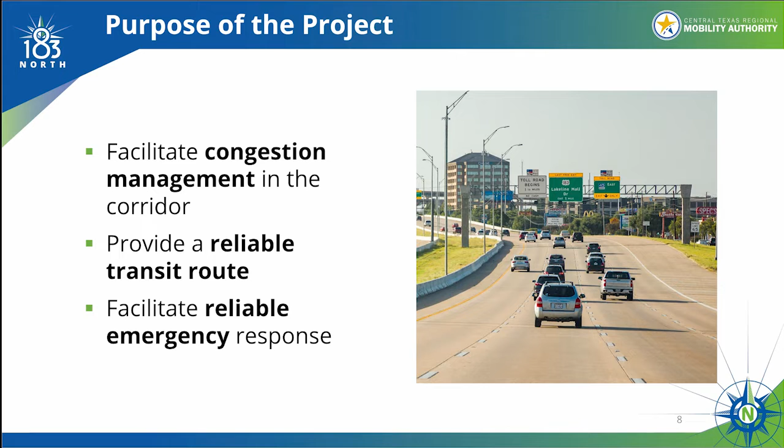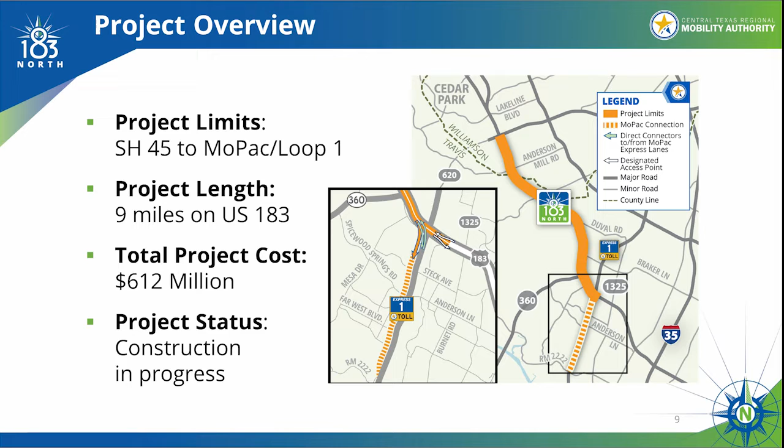Here are some of the key details of the project. As you can see on the map, our corridor is mostly between 45 and Mopac on US 183. The length of the job is approximately 9 miles long, and the total project cost is $612 million. We're currently in the phase of active construction. We will talk more in detail throughout the presentation about the improvements coming as part of this project along US 183. We will also talk later about the improvements we'll be bringing in the Mopac area, highlighted in the black square inset in the middle of the screen.

Here are some of the highlights of the project. We're building both tolled and non-tolled lanes. The project includes the construction of 2 express lanes in each direction and the addition of a general purpose lane, so that the total number of non-tolled lanes will be 4 in each direction all along US 183 between Mopac and 45. We're also bringing multimodal improvements and enhanced safety, which include new shared use path connections, new sidewalks, new cross-street connections for bicycles and pedestrians, enhanced traffic monitoring systems for improved traffic management and emergency response, and LED high-mast lighting, which will help increase the safety of the corridor.

Finally, we're addressing a mobility solution for travel between US 183 and Mopac, with operational improvements to southbound Mopac and adding express lane direct connections, which will be constructed with Mopac to the south, so that drivers are not having to exit the toll road to get on and off 183 if they don't want to.

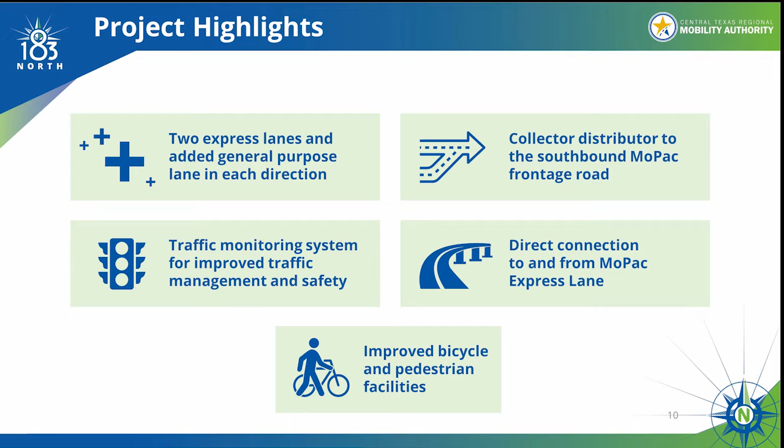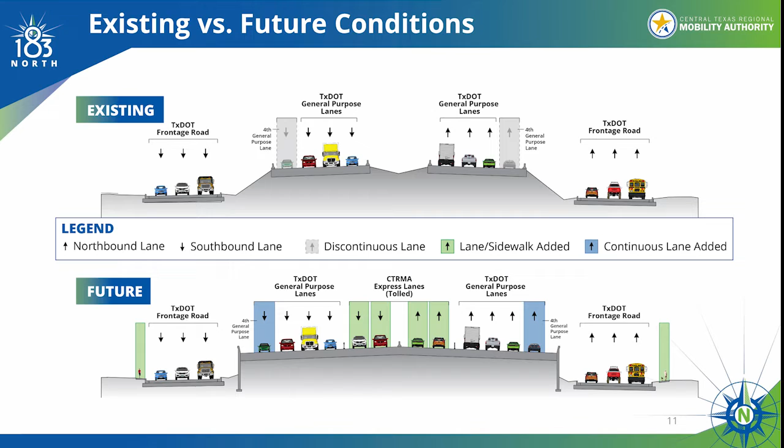This depiction of the existing and future conditions of US 183 highlights the added tolled express lanes in each direction, shown in green, as well as the additional non-tolled general purpose lanes shown in blue. When completed, those looking for a more reliable route on US 183 will have a choice to use the 183 North express lanes. Drivers who prefer not to pay a toll will still have the option to use the improved non-tolled general purpose lanes. Also shown in green on the outer left and right of the graphic are representations of newly connected sidewalks along the corridor business centers.

In addition to adding a 4th non-tolled general purpose lane in areas where there are only 3 today, the project is also improving auxiliary lanes and merging conditions in certain areas to increase mobility throughout the corridor.

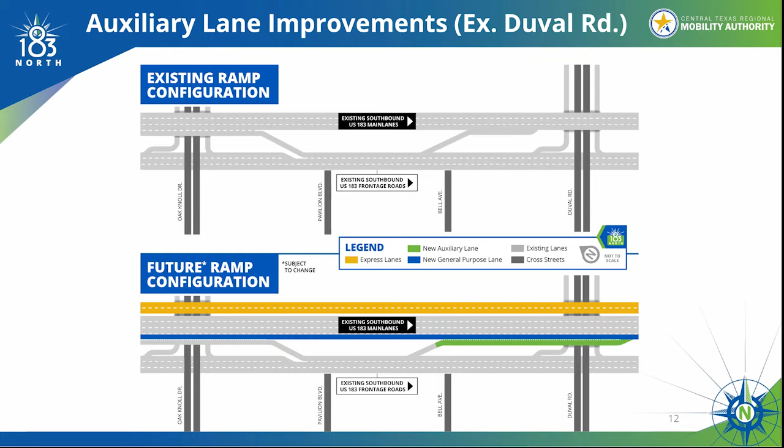One specific example of this will be seen at Duval Road on the southbound side of US 183, an area that's typically very congested. Here at Duval, the longer entrance ramp that we'll be building facilitates safer merging conditions with US 183 main lane traffic. The additional distance allows onboarding traffic to get up to speed over a longer length of space prior to having to merge in. In the existing condition, you can see how that entrance ramp is very short. It's tough to navigate, made even more so by the fact that it's actually in a curve. So the addition of the new general purpose lane and the lengthened ramp there will effectively target improved traffic operations, which in turn will reduce congestion in that area.

Now going back to the area at Mopac that I mentioned earlier, we are also bringing much needed improvements to the area of US 183 and Mopac to help the flow of traffic there between the 183 express lanes and the Mopac express lanes, with a direct connector structure as well as a new collector distributor road. This illustrated map is a great visual for understanding this portion of the project.

Beginning with the area shown by the number 1, the direct connection, sometimes referred to as direct connector or DC for short, will allow travelers to go from the tolled 183 express lanes to the Mopac express lanes, and from the Mopac express lanes to the northbound 183 express lanes. This structure also connects drivers to the area marked by the number 2, which is a collector distributor road, meaning a road that collects and distributes travelers to a signal bypass.

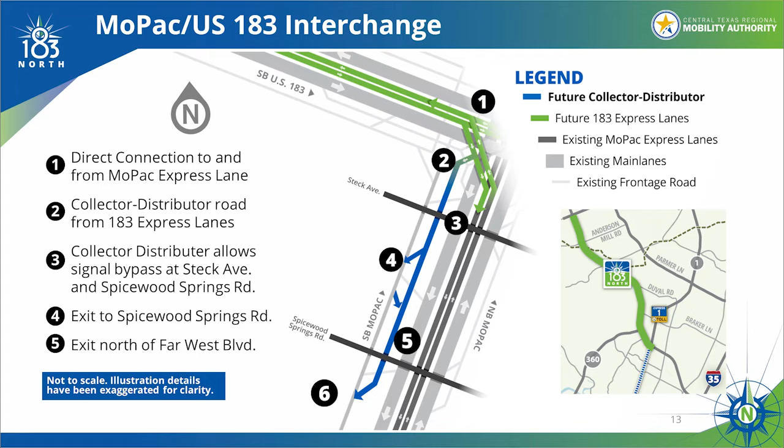So number 3 points out this bypass of traffic at both the intersections of Steck Avenue and Spicewood Springs Road. The following markers for number 4 and 5 show the exit for Spicewood Springs Road and the exit north of Far West Boulevard, completing the flow of improved travel. Not only will travelers be able to bypass the Spicewood Springs intersection by traveling directly through to the Far West exit, they will also experience greater mobility since they won't be merging with other drivers.

All of the project improvements are designed with the community in mind. Our goal is to increase mobility in the corridor for better quality of life for the entire community, in addition to helping ensure that emergency responders can get to you when you need them.

Currently, most sidewalks along the 183 North Corridor are not ADA compliant, and there are areas where sidewalks are just non-existent. The project will add sidewalks where they don't exist and improve existing sidewalks continuously so that the entire corridor is ADA compliant. The project will also provide safe connectivity for bicyclists by closing existing gaps to provide a network of continuous bike lanes between SH45 North and Mopac, as well as construct 2 new sections of shared use path.

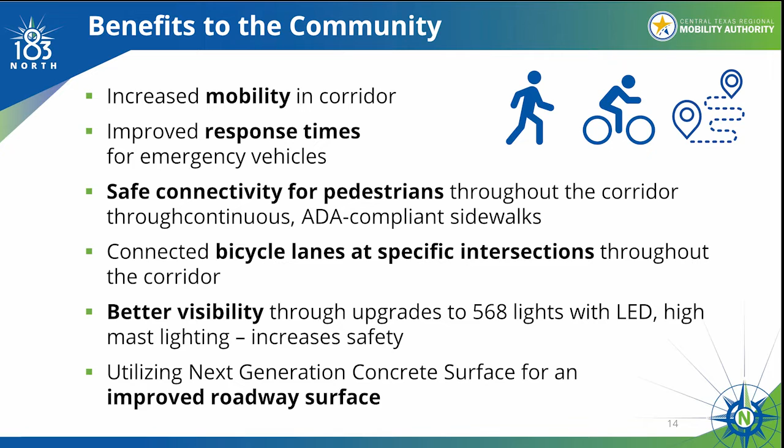The project also includes a new technology road surface on the non-toll general purpose lanes called Next Generation Concrete Surface, specifically designed to result in a better driving experience. Finally, road crews have installed new high-mast lighting fixtures along US 183. The new lighting provides a more efficient and eco-friendlier alternative to the conventional lighting that was previously along the corridor. High-mast lighting improves safety for commuters and pedestrians by providing visibility on the highway during nighttime and low visibility events.

For some time now, there have been temporary traffic shifts allowing us to retain 3 open lanes in each direction. At this point, there are parts in the north of the project near McNeil where there are 4 travel lanes already. Phase 1 is simply a continuation of preparing the lanes that will be used for shifting traffic over the second phase of construction.

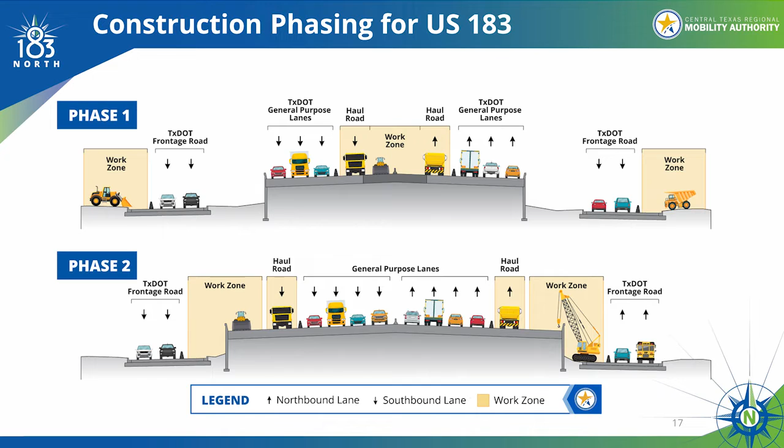Looking at the bottom half of the graphic, it indicates this effort as reliant on the preparation of the work zone, which will then be on the outside of those center lanes, making it possible for us to embark on constructing on both sides the 4th non-toll general purpose lanes from McNeil all the way down to Mopac.

Speaking of Mopac, during phase 1 of our work there, we will address the main lanes. The focus will be on expanding the existing frontage road so we can move traffic over on the main lanes to facilitate building the new direct connector approach between the express lanes.

Mopac only has one express lane in each direction in this area, as you can see in the bottom image. As a result of construction phasing and switching traffic, the work area will then be larger to accommodate the work on the direct connector and the additional connection to the 183 North express lanes.

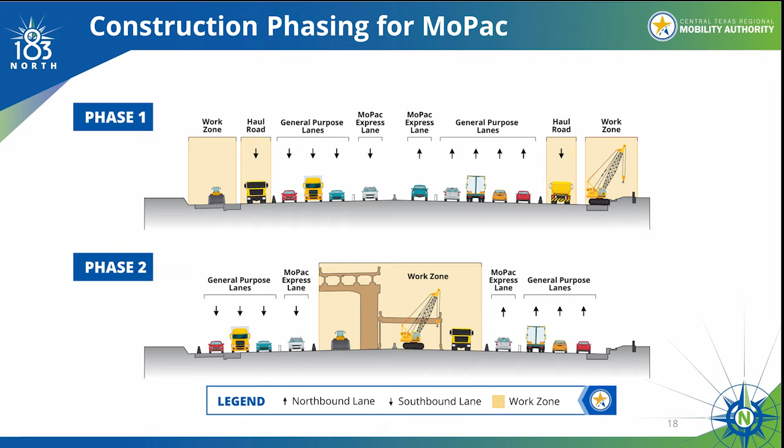Phasing our work in this way is truly a blend of step-by-step processes, along with simultaneous development of prepping work areas for those specific processes, all while minding existing public travel needs, safety, and a variety of other associated factors.

In 2023, our crews accomplished some great construction milestones, including 100% completion with concrete substructure work in the center median, 50% completion of the outside concrete substructure widening between McNeil and Great Hills Trail, and 75% completion on the interior widening concrete paving from Lakeline Mall to Mopac.

We installed a temporary ITS system that is fully in place between Mopac and 183. Additionally, we completed the inside widenings of bridges at Lake Creek, Pecan Park, Anderson Mill, McNeil Spicewood Springs, Duval, and Balcones Woods. In 2024, crews will continue their work as we track towards project completion in 2026.

Let's take a closer look at some of these activities.

Sidewalk construction is a very special part of this project because we are addressing the disrepair and lack of ADA compliant connected sidewalks along the US 183 frontage roads. Our work to bring continuous sidewalks along the entire corridor involves a lot of coordination with local businesses, utilities, and of course the traveling public.

To complete this crucial task, we're required to work closely with the business community to reconstruct multiple driveways that pass through the sidewalks, or sometimes add sidewalk where there was none. We will detail more on how we have been communicating and mitigating impacts to these businesses in our outreach discussion.

An important piece to note is that for businesses with only one driveway, we only work one half of the driveway at a time. Or if they have the option, we always maintain a second entrance for team members and visiting customers.

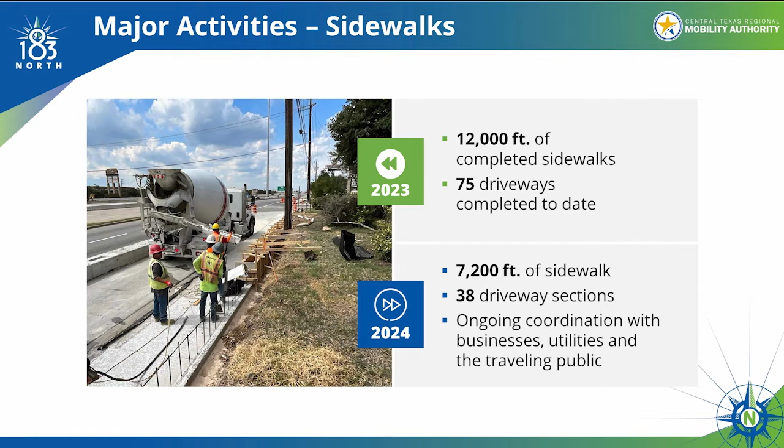Other highly visible changes on the project are bridges. When we start work on the outside bridges this year, we will have to temporarily close lanes that are directly next to or close to work zones for safety purposes.

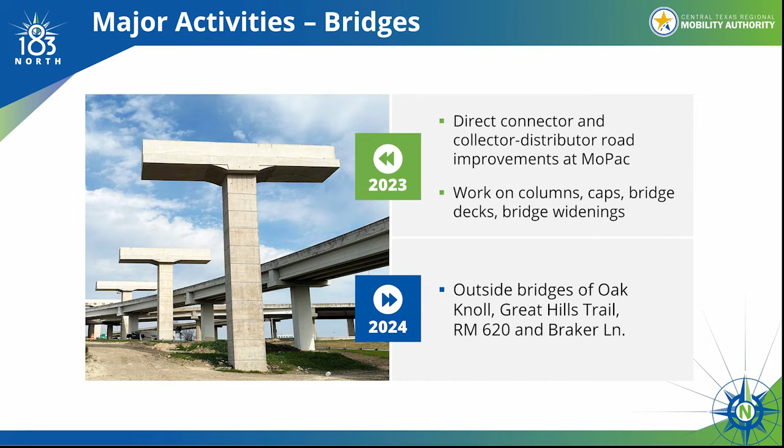The outside widening bridges at Oak Knoll, Great Hills Trail, RM 620, and Braker Lane are still to be worked on this year. The traveling public can expect to see U-turn closures and periodic closures of Mopac and US 183 as we build all of these overtop features.

This year we will work on adding the fourth general purpose lanes. This means roadway construction will take place as crews work on widening lanes and building retaining walls.

As we saw in earlier slides, this work will involve the frontage roads and will include various drainage improvements. It's important that the traveling public understands that our earthwork crews spend a lot of time in the center median to prepare these sections for handling traffic flow, while newly closed areas become support for building retaining walls correctly.

While the specific wall work that follows through 2024 will mostly take place at night, it will require some continuous lane closures to allow a total of 14 crews to work in the designated areas for a number of months on these retaining walls. Putting it simply, US 183 main lane closures will decrease this year, but frontage road closures will definitely increase.

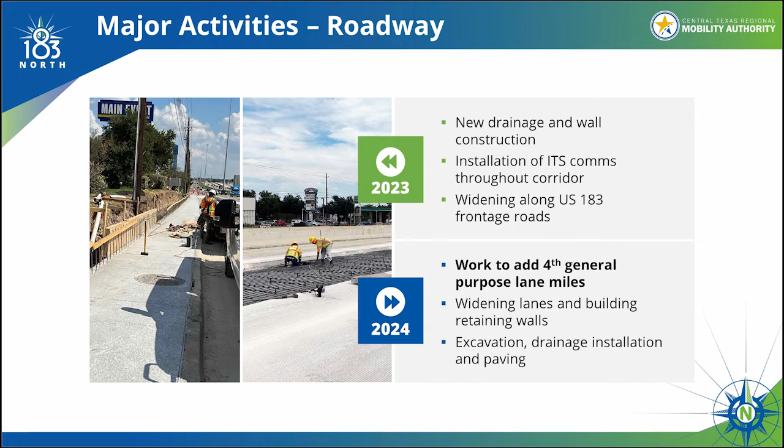In addition to all the other work we have just covered and the related lane closure changes needed, crews anticipate a traffic shift into the newly paved center median to occur this year. Exact timing has not been determined and will definitely be subject to change based on weather and other factors. That traffic switch will allow crews to then focus their work on the outside lanes of the project.

The main takeaway: as our crews work diligently to improve your commute, stay alert for various construction signs and lane changes. Your safety is our top priority.

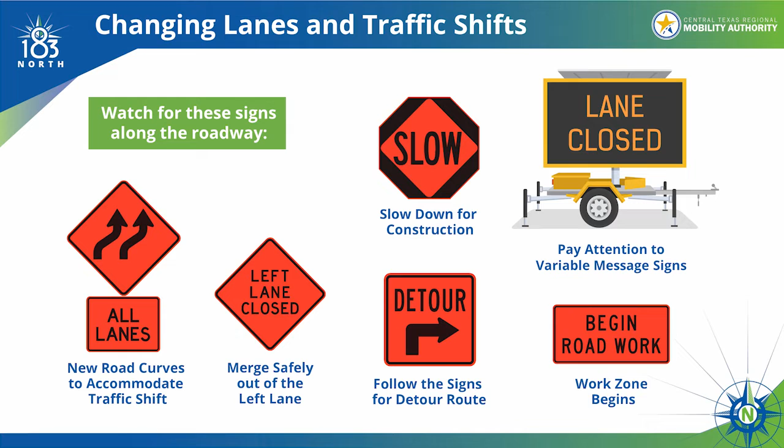Now let's look at our approach to community outreach and where all we went in 2023. The Mobility Authority and TxDOT are committed to being a partner in the community and working proactively with commuters and local residents throughout the construction process and beyond.

The project team has engaged in collaborative communication efforts to keep you informed and to respond promptly to public questions and issues. We will continue to do that. We continuously post updates throughout the year.

We have an active presence online with social media and by updating the project's website, 183north.com, as well as tweets on our X, formerly Twitter, channel at 183north, and posts on the Mobility Authority Facebook and Instagram pages.

Other things we do include emails about weekly lane closures and a bi-monthly newsletter, which you can sign up for on our website under Sign Up for Updates. And also, for bigger announcements, we contact the media and post news releases to make the public aware as needed.

We also prioritize communication with our local business communities who may be affected by the driveway work that I mentioned earlier. We hold one-on-one visits with these businesses to inform them of construction activities and provide free open-for-business signs to let customers know that they can still access the businesses during the driveway work.

Additional engagement efforts center around attendance at local HOA and neighborhood association meetings. We've met with multiple groups continuously throughout the course of the project and are always looking for more ways to keep the community informed. The project team also aims to support local neighborhood and community groups by attending local events or hosting our own events to give back to the public and thank them for their patience during the construction.